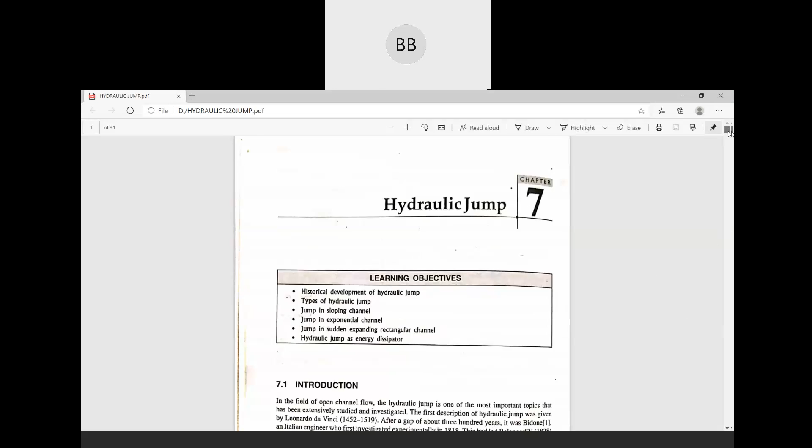Okay, so I think we have completed our gradually varied flow chapter. So today we will start a new chapter called rapidly varied flow or hydraulic jump. I think we have already discussed what rapidly varied flow is and what hydraulic jump is in the last class. So today the first topic we are going to discuss is some examples of hydraulic jump, or you can say its occurrence in field conditions.

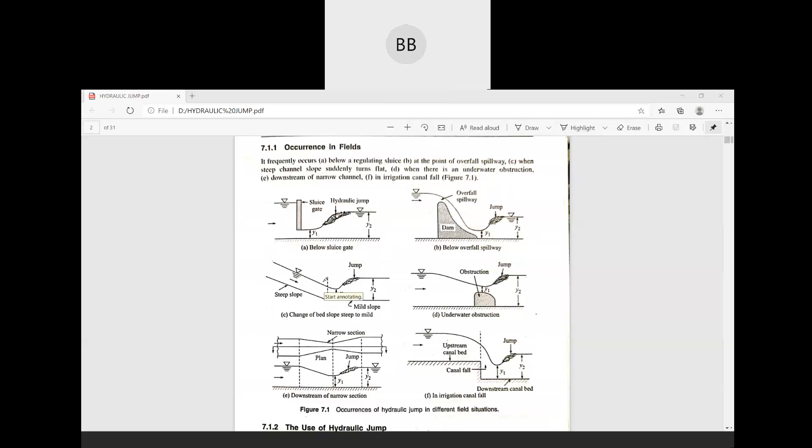You can see these figures here. In the first figure, we have a sluice gate and this is the level of water. Once you open the sluice gate, the flow of water from a lower depth rises to a higher depth, because here the cross sectional area is very less, and once it comes out from the sluice gate, it gets enough space to increase its height. So that is why your depth changes rapidly, in a very short span. That is why it is called rapidly varied flow, or hydraulic jump.

Hydraulic jump is always from supercritical to subcritical. When your flow changes from supercritical to subcritical, then we can say it's a hydraulic jump. That means your critical depth is somewhere here. You all know depth of flow in supercritical is always less than critical flow, so your YC is here somewhere. So your Y1 is always less than YC, and Y2 is always greater than YC. So it will be somewhat like Y1 less than YC less than Y2. This is one condition of hydraulic jump.

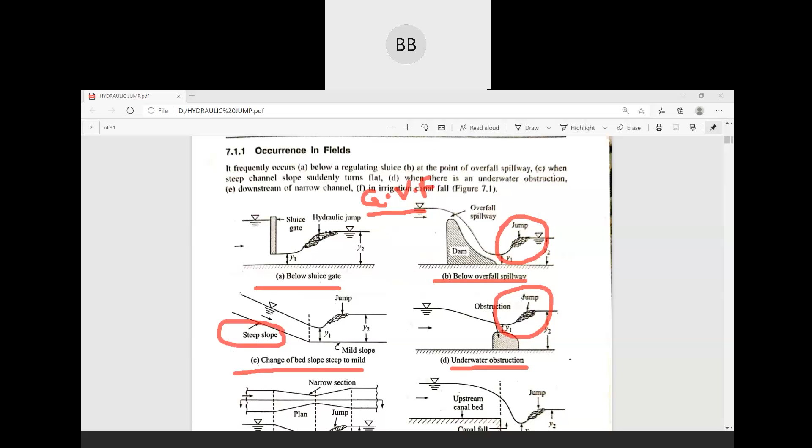You can draw these diagrams. Here in case C, you can see when you have a steep slope, and again if you change to mild slope, then also you can observe a jump. Then in the fourth condition, if you have any underwater obstruction, then also you can observe a hydraulic jump. These diagrams are nothing but the occurrence of hydraulic jump in different field situations.

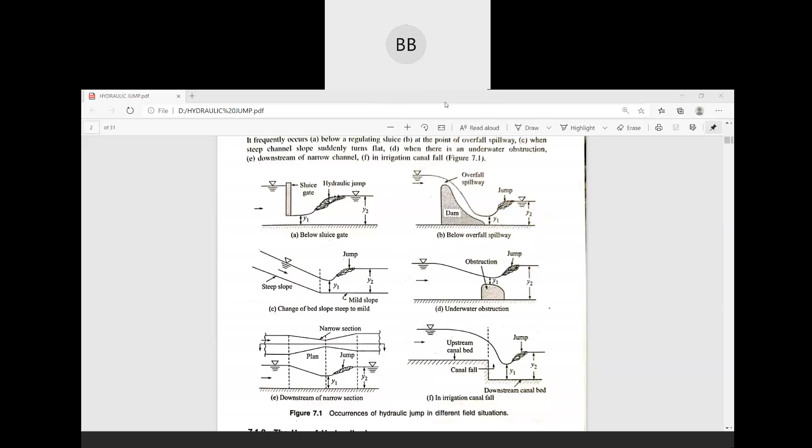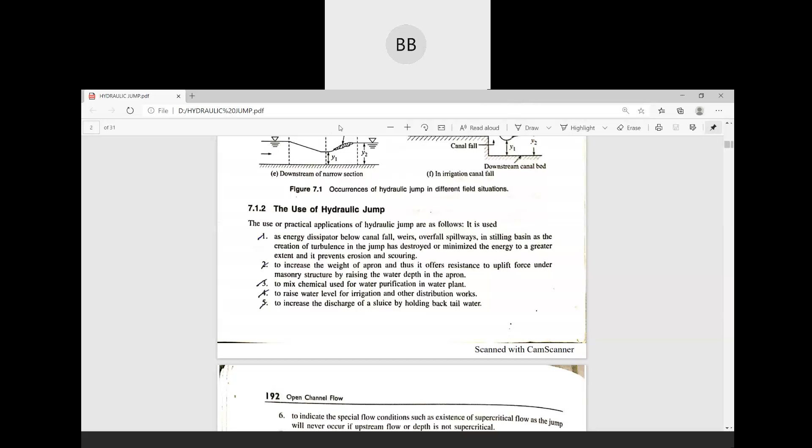Okay, then we move on to the next topic: uses of hydraulic jump. These are the five most important uses of hydraulic jump. First, as an energy dissipator. Second, to increase the weight of the apron to resist the uplift force under masonry structures. Third, to mix chemicals used for water purification in a plant. Fourth, to raise the water level for irrigation and other distribution work. And fifth, to increase the discharge of a sluice by holding back tailwater. So these are the most important uses of hydraulic jump.

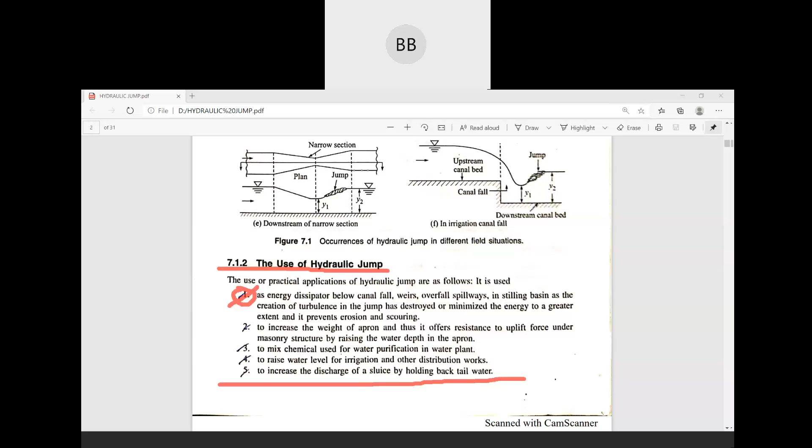So you can write it down. There are many, but these are the most important uses of hydraulic jump. You can write down all five uses.

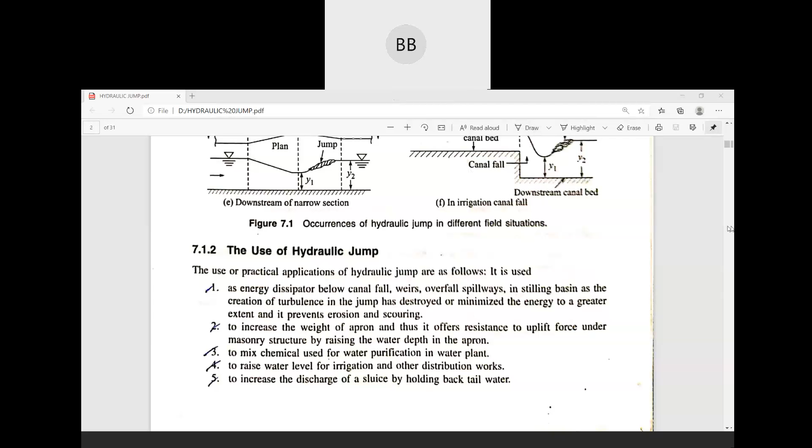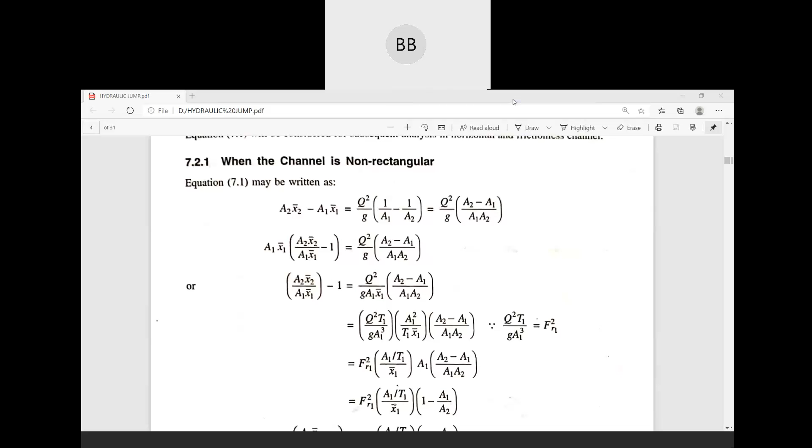Okay, so we move on to the next topic: jump analysis in a non-rectangular channel.

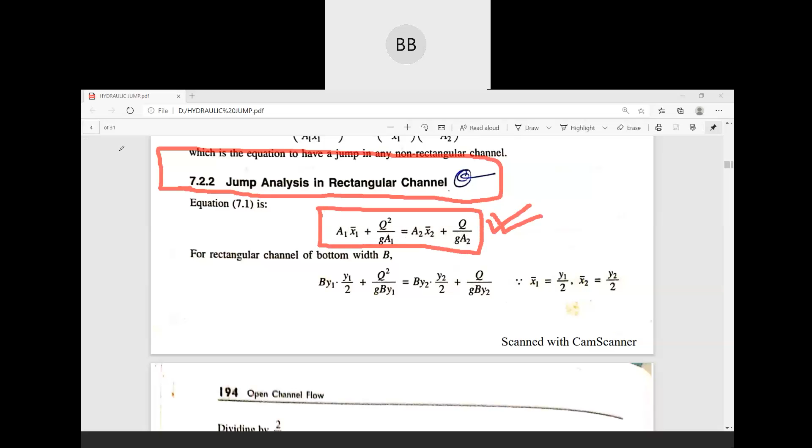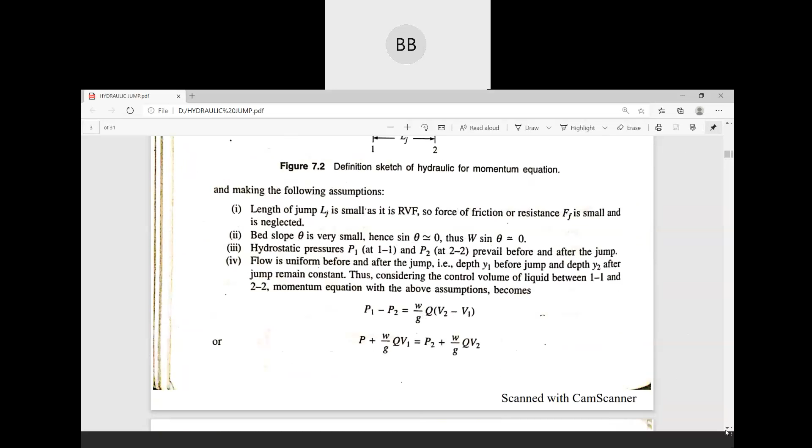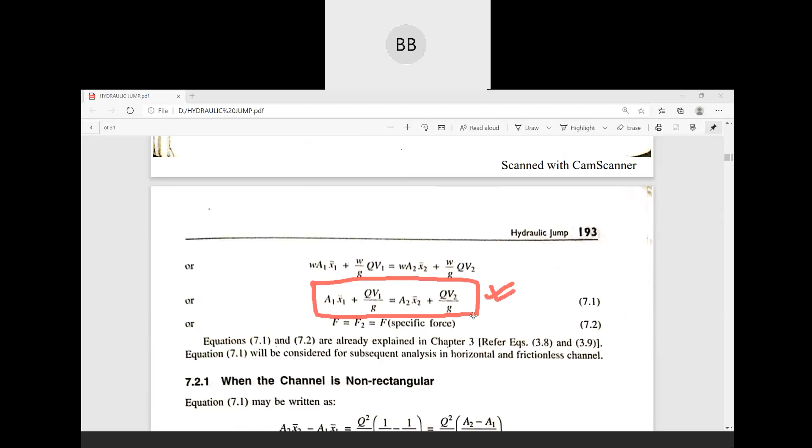So first you write down this equation. This equation we have derived many times, so you can directly write it down: A1 x1 bar plus Q square over g A1 is equal to A2 x2 bar plus Q square over g A2. If you want to see the derivation of this equation, it's already there, derived from the momentum equation, and this is the resulting expression. It's just five to six steps. I am going to share this PDF file with you, so you can go through the derivation again if you want. It's just that you have to use the momentum equation, and from there you can easily find this expression.

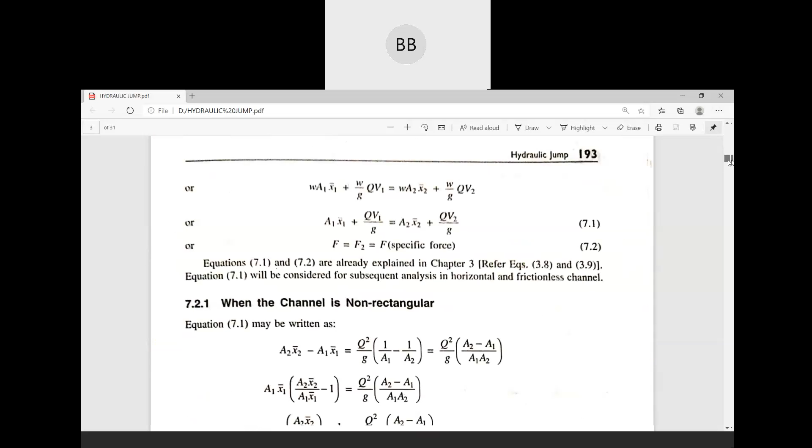So we are going to use that expression for jump analysis in a rectangular channel. For a rectangular channel of bottom width B, we consider the bottom width as capital B. Now we substitute the area expression in this equation. A1 will be B into Y1, multiplied by x1 bar which is Y1 divided by 2, plus Q square by g, and again A1 is replaced with B into Y1. Similarly for A2: this Y1 is the depth of flow before the jump, and Y2 is the depth of flow after the jump. So we get B Y2, and for x2 bar it will be Y2 divided by 2. So you write down this expression.

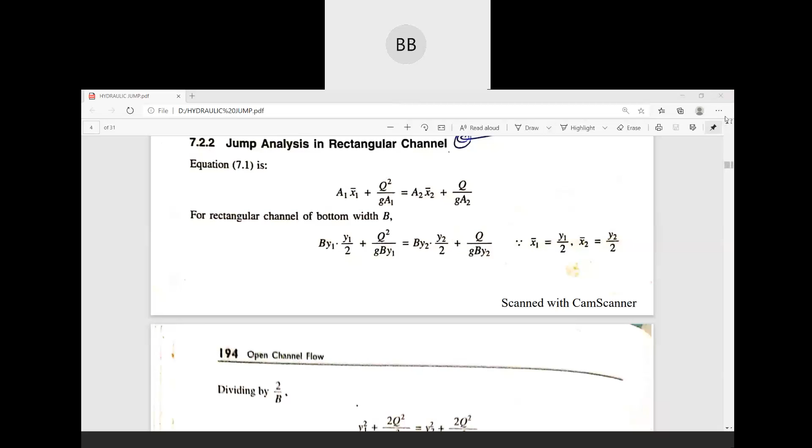After this, you have to multiply the whole expression by 2 by b. Sorry, you don't have to divide, you have to multiply. There's some printing mistake in the book, so you don't write divide, you write multiply by 2 by b. So each term in the above equation.

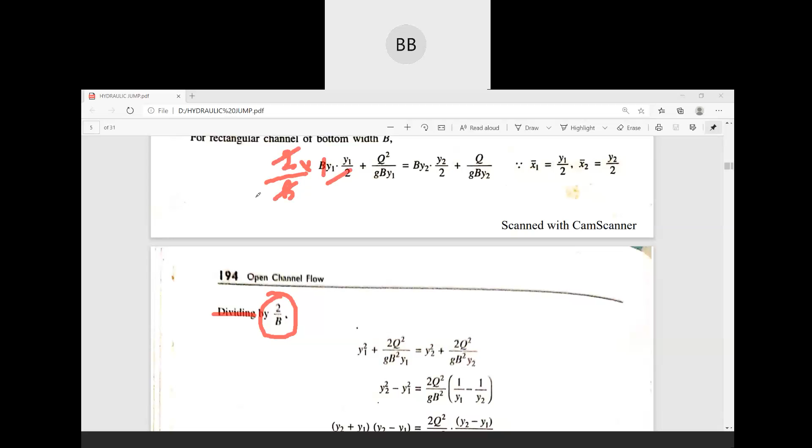In the first term, if you multiply by 2 by b, this b and this b will cancel out. What will be left out? Y1 square. This 2 and this 2 will also be cancelled out, so the left out term is y1 square.

Plus, then again you have to multiply 2 by b to the next term also. There will be twice q square. The 2 will be there, so this b square will be there, and other terms will be left out, same as it is. Only that 2 will come, and here we initially have 1b, and if you multiply it by another b, it will be b square.

Similarly, for the right hand side also, we have to multiply each term by 2 by b.

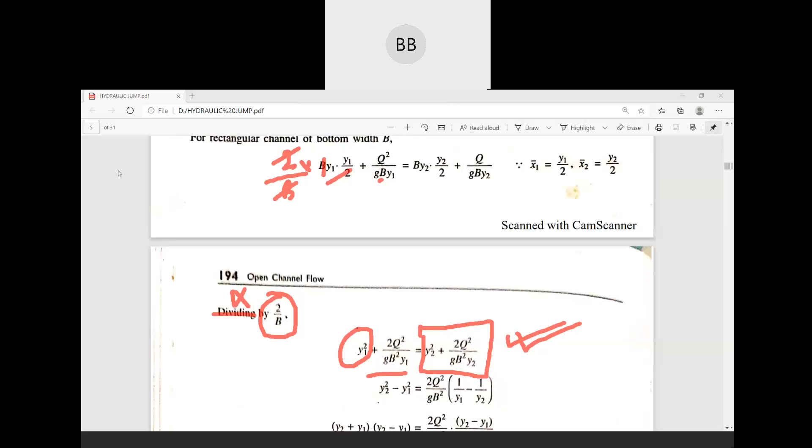After that, you have to bring all the y values to the left hand side. Here y2 square is there; if you bring this to the other side, it will be minus y1 square. And 2q square by b square is already there by y1; if you bring this here, it will be minus. So in these two terms, you see twice q square by b square are common, so that brings out 1 by y1 minus 1 by y2.

We all know a square minus b square can be written as a plus b multiplied by a minus b. So here also, y2 square minus y1 square, in place of this we can write y2 plus y1, y2 minus y1, and we solve this.

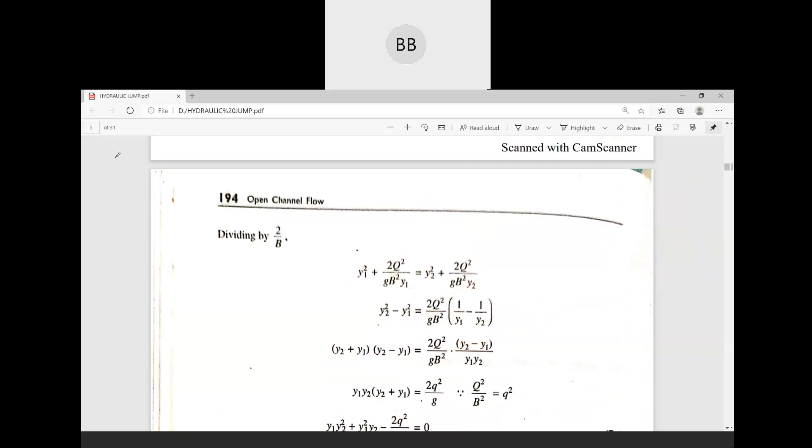After that you have to multiply: y1 y2 square plus y1 square y2, and if you bring this to the left hand side, it will be negative, equal to 0.

Now it's a quadratic equation we have to solve. So we solve using this equation: minus b plus minus root over b square minus 4ac, by twice a. One we take plus and once we take minus. This is a very common mathematics term; I think all of you know how to solve a quadratic equation this way.

So here we are neglecting the minus term, we'll consider the positive one. If you solve here, you have to consider one term as a, one as b, and c. We have three terms: a, b, and c. So if you put them in here...

The second term, then square of the second term minus 4 times the first into the third term, divided by twice a. If you put these in, you will get this expression.